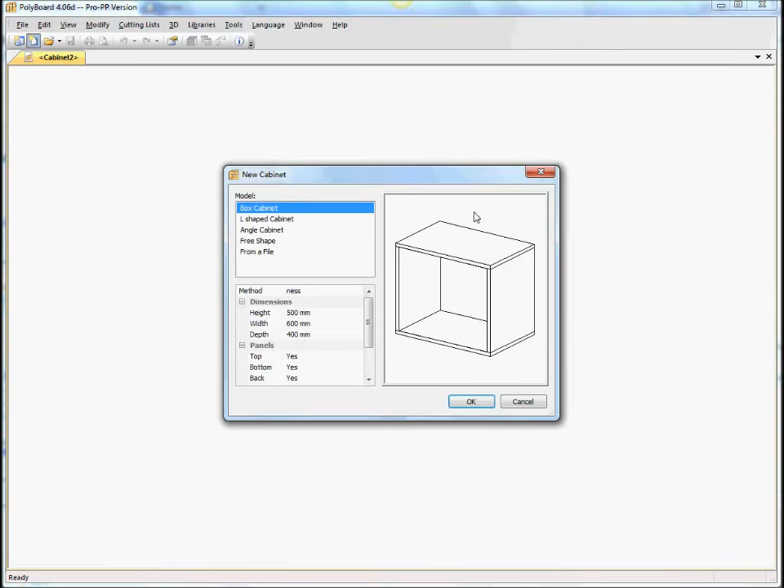Let's make a bed. Let's start with a simple cabinet, which is very simple. Here is a simple box cabinet. Here we have a basic box.

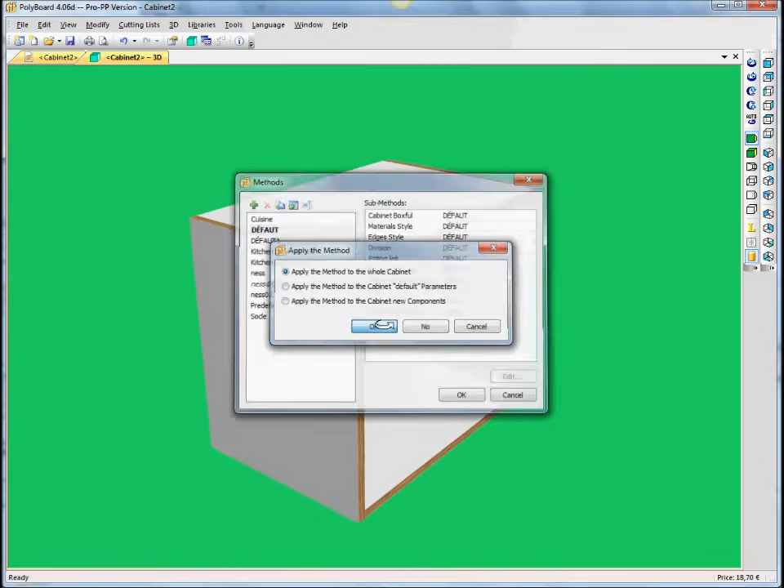Let's change materials to the box so it looks more like a bed. Let's hang on - before we change materials, let's apply a manufacturing method, which is just a default manufacturing method. Voilà, that's the default manufacturing method, so we don't have any assembly details.

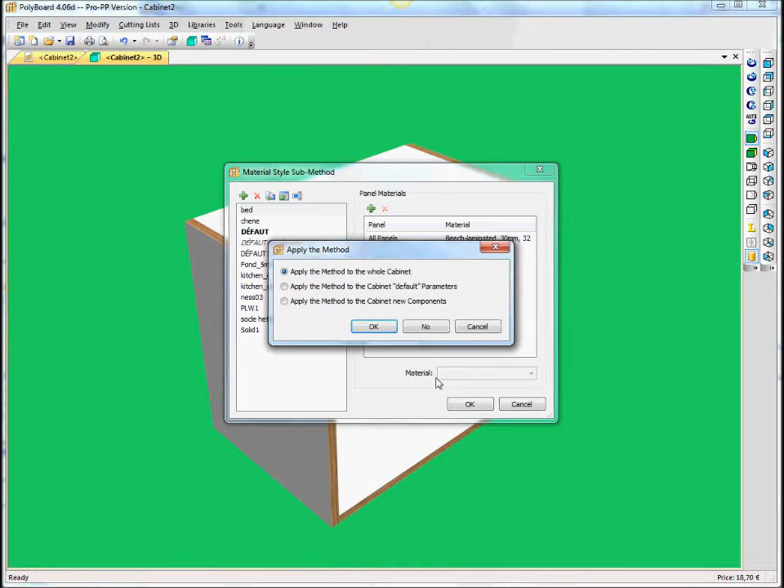Let's get rid of the materials and put in a materials style which I prepared for it, which is actually a bed. We say that these are just panels all made of laminated beech 30mm, which is better for a bed than a laminate. So here we have 30mm. I put some edge banding on it, but this is just to show the edges a bit better in the 3D display.

Now let's do the modelling. How do we do the modelling? Well, first of all, let's give it the right sizes - let's give it the overall dimensions of the bed.

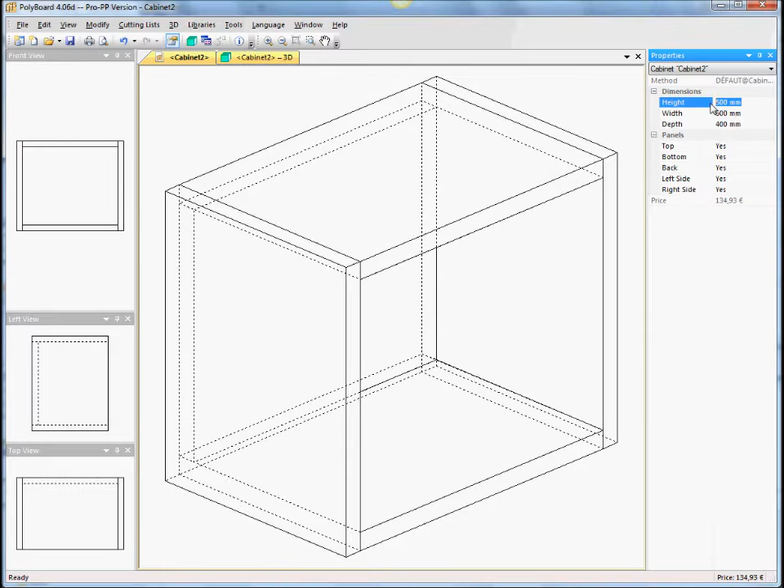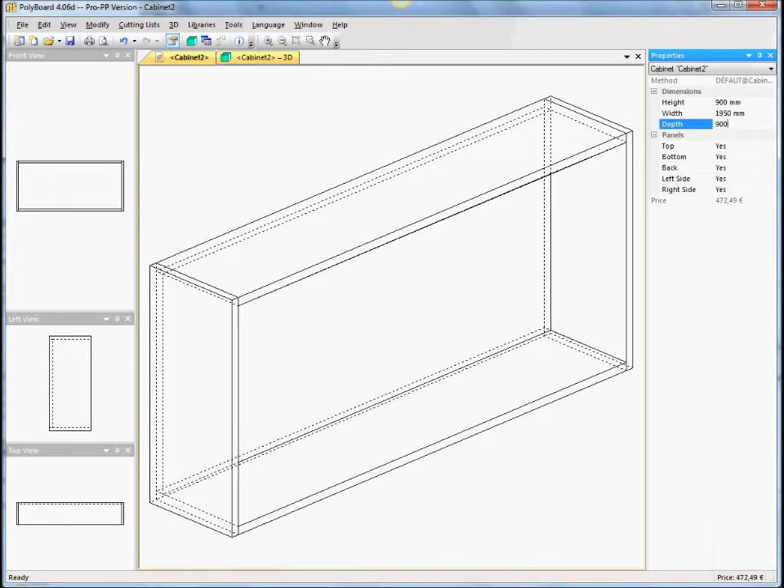Let's say the height of the bed is around 900mm, the width of the cabinet, which is the length of the bed in my case, is 1950 - that's 1m95 - and the depth of the cabinet, which is the width of the bed, would be the width of the bed. Let's give it 900mm - this is a 900mm mattress, so let's give it a 960mm width. Here we have the volume of the bed.

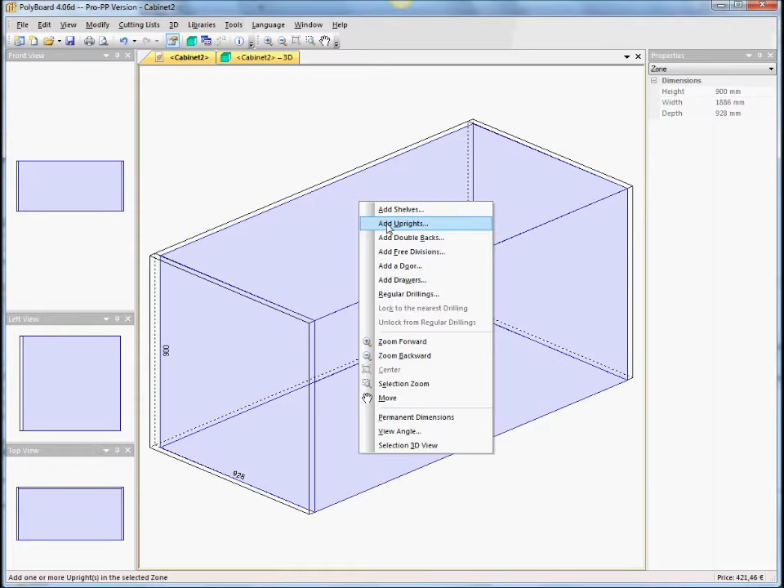Let's say that for the bed we don't need the top, because it's a bed, and we don't need the bottom either. But what we do need is these 3 panels here, and we need a front. So let's put in the front - let's add what we call here a double back, that is another back, along with this one back in the box.

Let's put another back onto it, and set it at a distance from the front - this back, actually, at distance 0. It will in fact be the front side. So what we get now is this square box or hole. Let's give the size of the header board now.

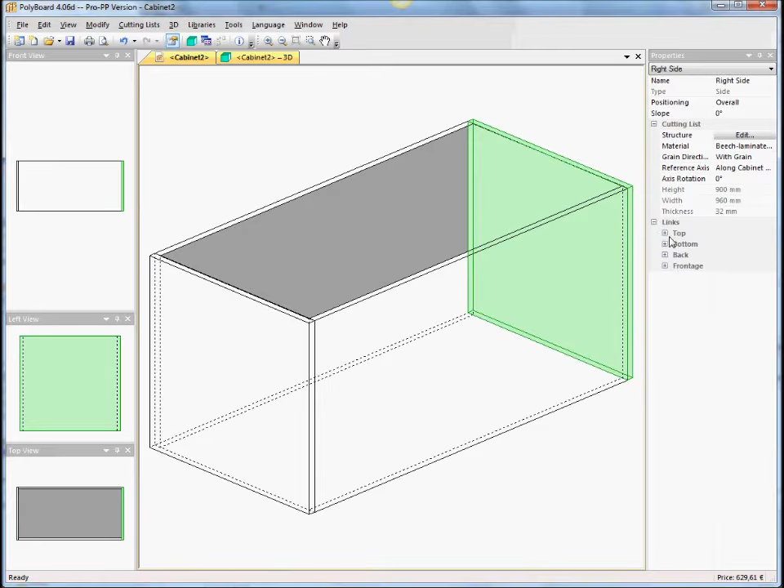Click the header board here, and let's say the top has an overlap on the top of the header board of, let's say, 600, and the bottom will have an overlap of say 150. Now we have the header board and the framing of the bed.

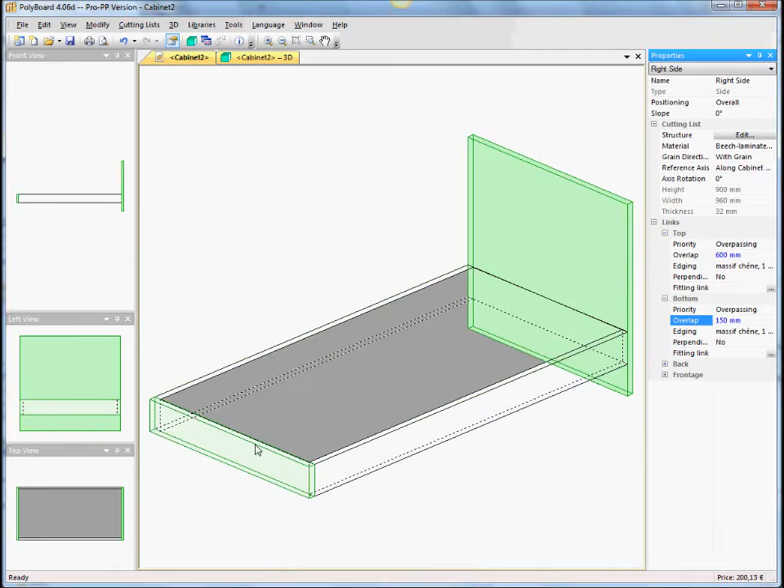Now the footboard of the bed - let's have a look what that does. Let's give it an overlap with the top, say of 300, and for the bottom let's give it an overlap of the same as on the header, 150. Right, now let's have a look at the bed.

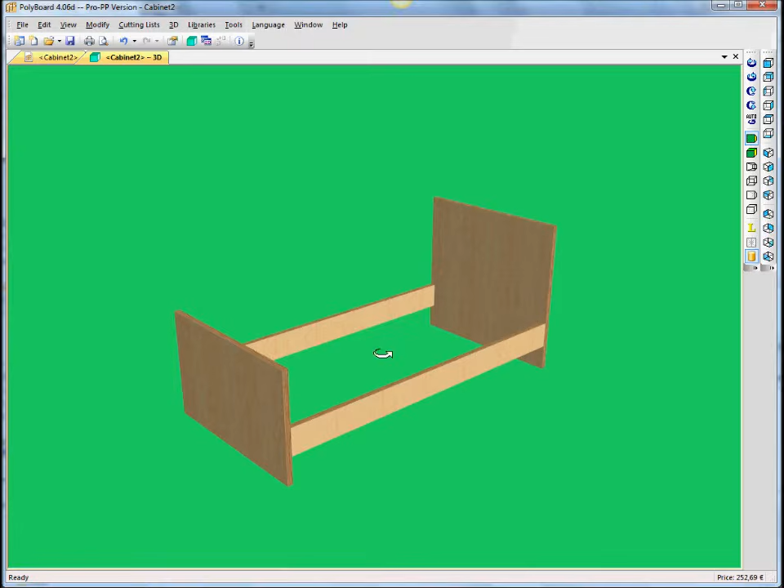This is our bed structure, which looks a bit like a bed, but let's make it a bit prettier. For instance, for this structure part here, let's add a shape to it. So we take the top, for instance, and say that it is in fact an arc of a circle, and that this arc of a circle is, say, 30%

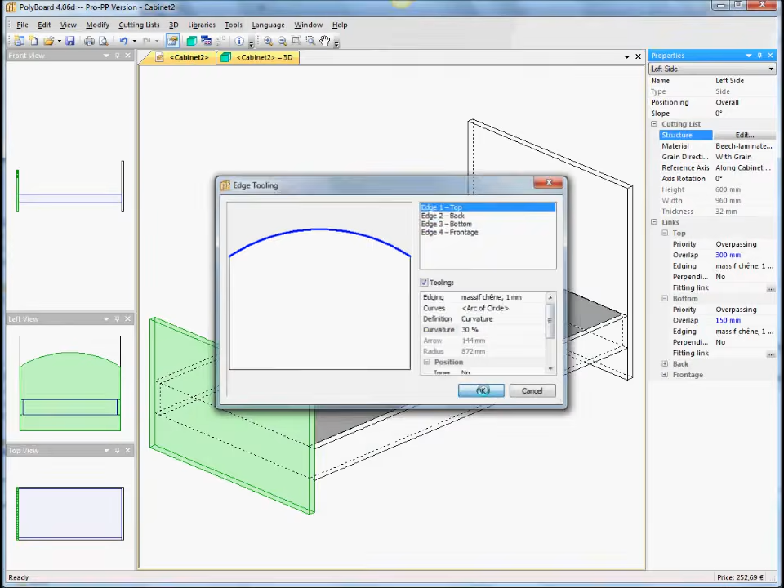30% bigger than it was in the original, which came in from a DXF file, and that's fine. Let's do the same for this one here - we say it's got a structure, the top edge is an arc of a circle, and let's put it a bit more than 30, say 50%, and that gives us this.

Here we look at our bed. On the top side here we could also put something in the middle. For instance, let's say an inner tooling - let's say we'd like some sort of shape, a cutout shape. For instance, let's have a cutout shape of a heart.

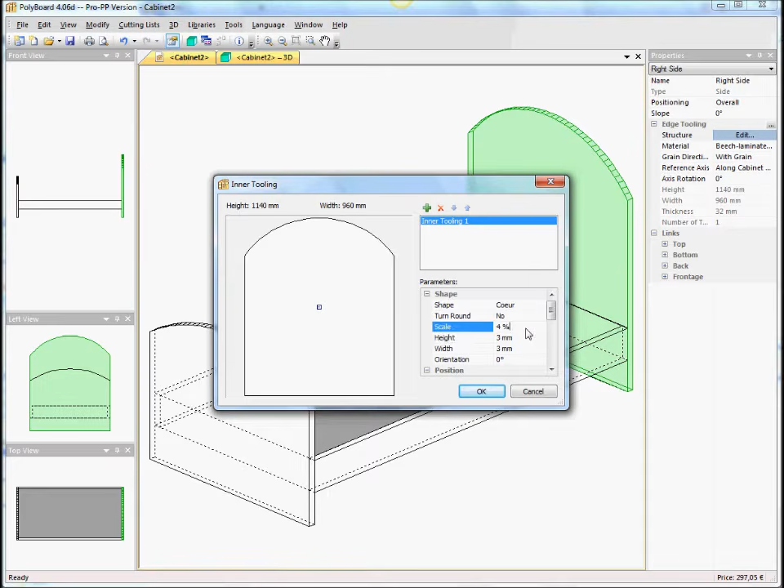This heart, let's say, is 4 times as big as the original DXF file - 400%, sorry. And let's position it up a bit from the center of the board - let's put it up at 250 and see what that gives. That looks okay, and that's a heart cut out in that shape.

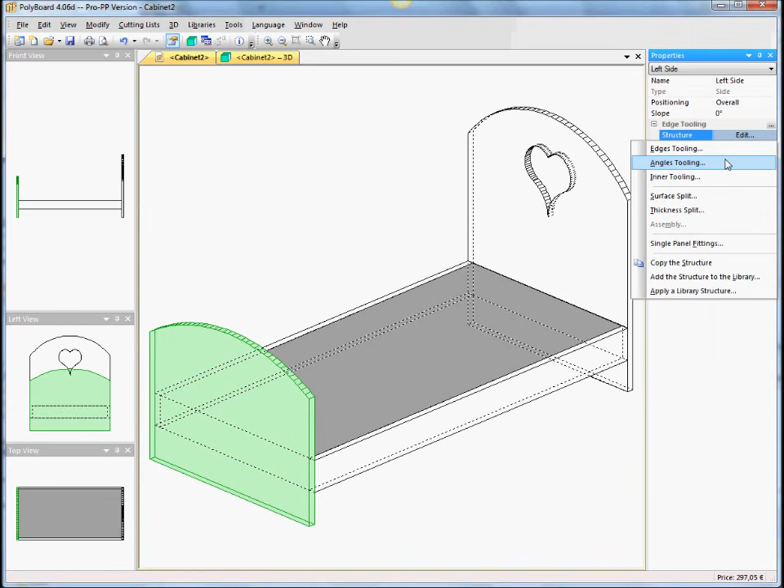And let's do the same thing for the bottom, the footer of the bed. Let's give it an inner tooling, and let's say we want also a heart, just to keep it symmetrical. This heart is a bit smaller than the other one - it's 300%... I mean smaller - and it's positioned above the middle of the board. Let's knock it up about 200mm and see what that does.

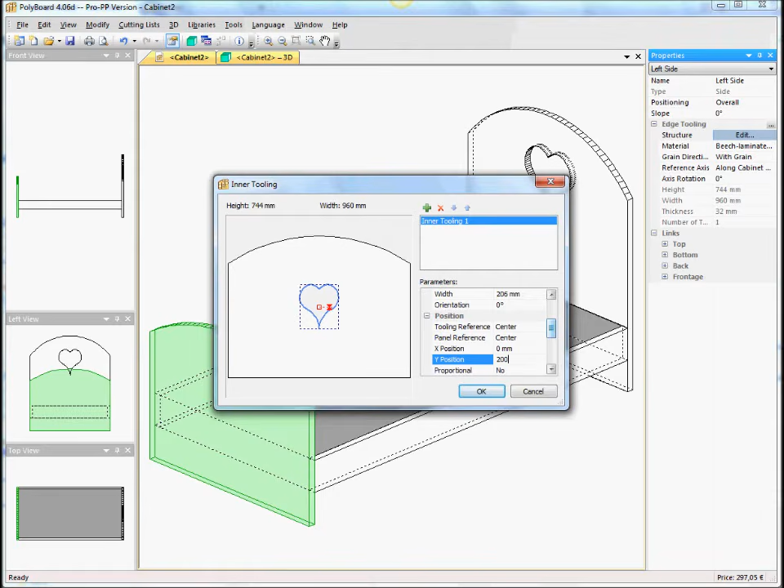That's fine, and our bed is now looking a bit like this - let's make it look a bit more decorative. Now let's add on the bottom another inner tooling, and this time we'll put in a rectangle.

This rectangle, we're going to give it a height of 150mm, which is the same distance as the headboard and footer go beyond the rails. Let's give it a width so that it leaves about 100mm on either side of the bed, so if the bed is 960, that'll be 760.

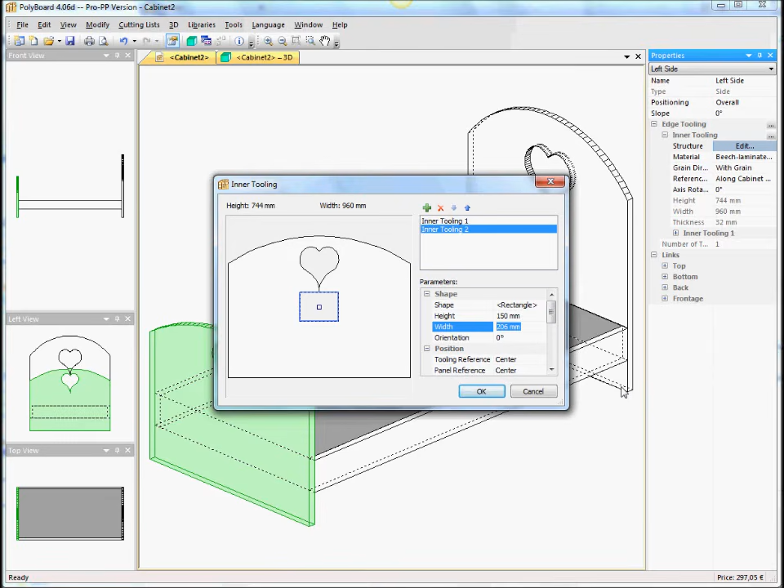And let's give it the position - the reference of the tooling will be the bottom, and the reference of the panel will be the bottom, and the Y position will be 0. That will put my cutout at the bottom, and that'll be okay. And there we have it - here is a bed.

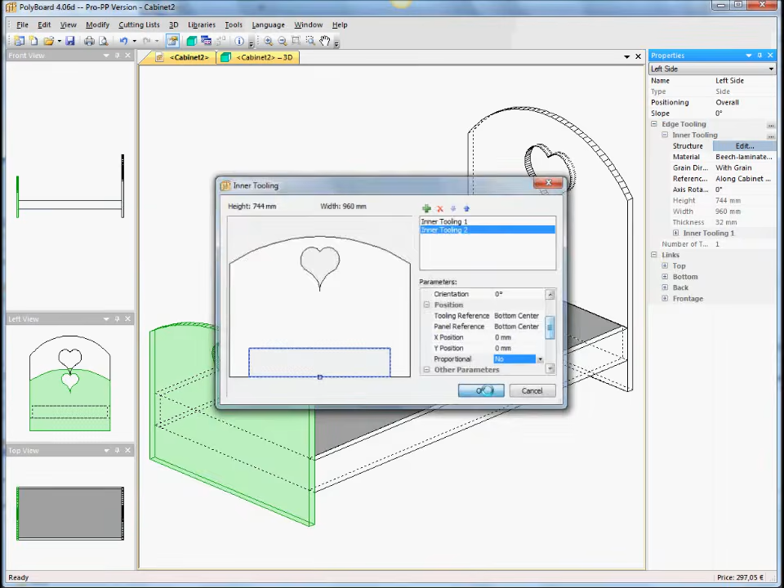Of course, we can continue modelling - let's do it in auto. We could change the shapes of the rails, change the shapes of the headboards, and put assembly details onto it. That'll be maybe another video.